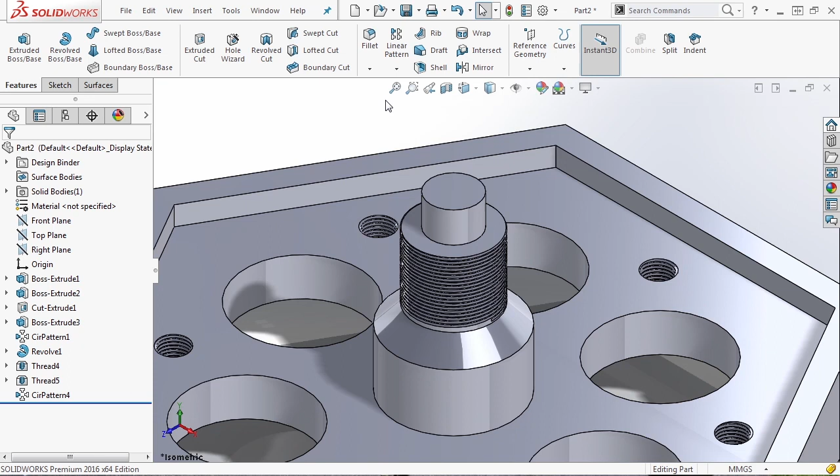To add a chamfer, let's go up to our fillet dropdown and select chamfer. We're going to start by selecting the edge on the end of our part. You'll notice we get a nice preview on the screen, and there's also a dialog box that pops up. This allows us to change the parameters by selecting and manually inputting them, or by using the up and down arrows.

But there are some options in the parameters that you don't have in that dialog box. For instance, you can change it from angle distance to distance distance. You can also use equal distance or flip direction options in here, as well as a whole host of other things. For our purposes, the only thing we're going to modify is the angle.

We're going to change from a 45-degree to a 60-degree angle. You'll notice that it automatically disappears, or it changes the preview. If we use the flip direction option, we now get our preview back. What happened is, by default, the way it was originally set up, adding that 60-degree chamfer was removing the center—it was going past a perfect point. So we had to flip the direction.

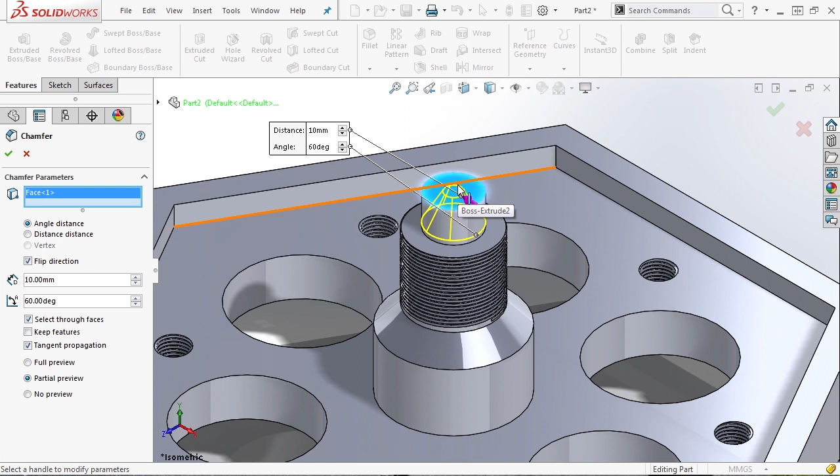Now, if you want to do this on the screen, you simply left click on the purple arrow, and that'll change the direction of the chamfer. We can say OK, and take a look at the tip that's been added.

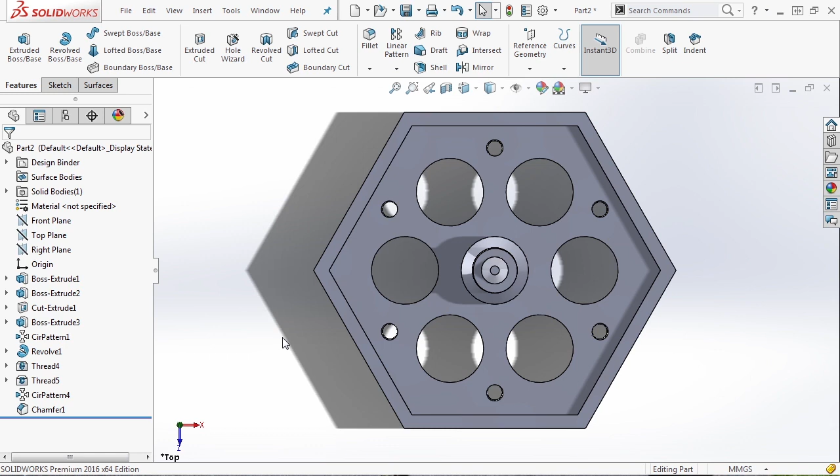The next thing we want to do is add a few fillets. Because this part is machined, if we view it from the top side, you'll notice we have some sharp internal corners. These are corners that could not be physically machined on a mill. So we want to take care of adding a fillet to those, as well as the outside edges.

To do this, we're going to start by selecting fillet, and we're going to modify the fillet radius value. By default, whenever you start fillet, this is automatically highlighted, so you can just start typing. In this case, I'm going to say 15 millimeters and then start selecting.

Now, the fillet tool inside SolidWorks is one of the best in the industry. It allows us to make a selection, and from the quick context that pops up, you have a whole host of options to make your selection process quite a bit easier. As you go down the line, you'll notice it has all concave edges, all edges on the part, all connected edges, right feature, internal to feature, and so on.

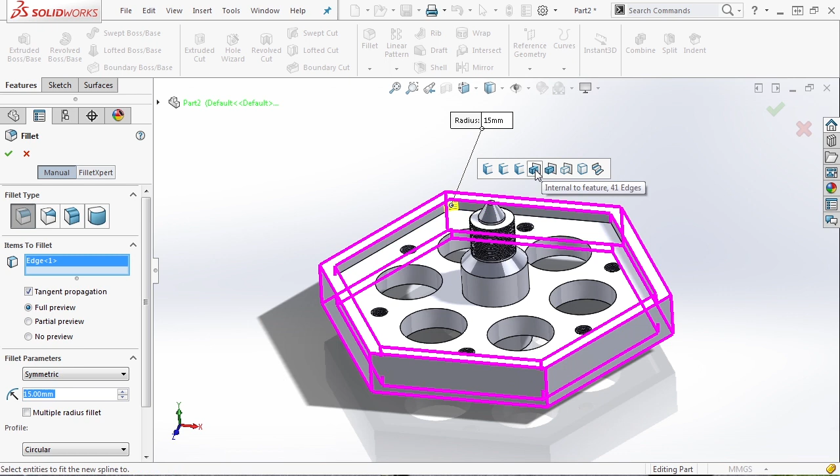The one we're really concerned with is connected to start loop, which is the internal 5 edges on the top. So we left click on this, and it automatically grabs all those edges. Then I'm going to hold the middle mouse button down, rotate around, and make that same selection process on the bottom. This grabs all the internal edges we need to be concerned with, so we can say OK.

Next, we're going to add another fillet, and this time the fillet value is going to be 30 millimeters. The 30 millimeter value came from a 15 millimeter internal value and a 15 millimeter wall. That way we keep a nice consistent wall thickness all the way around our part.

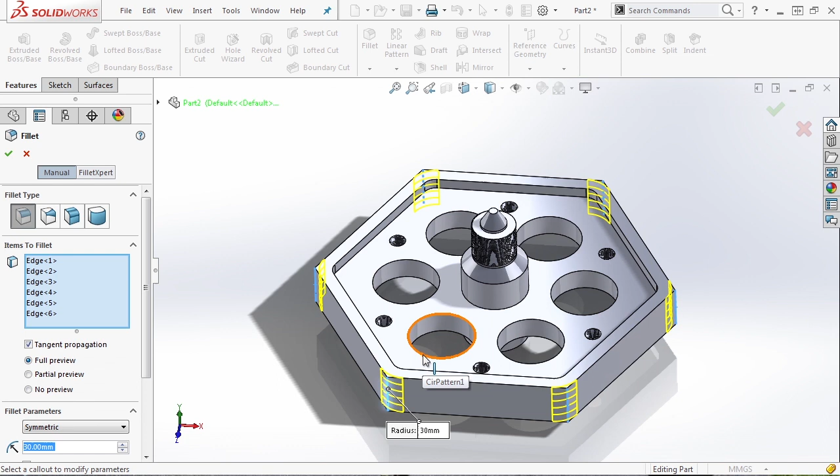I'm going to select a single outside edge, and again use my quick context menu to grab all the outside loops and say OK. Now if we take a look at this from the top, we have a nice 15 millimeter internal radii, so we can use a 30 millimeter diameter machining bit, and we have a nice 30 millimeter outside that we can go all the way around and machine the outside of our part.

Let's go back to an ISO view and take a look at what we've done so far. To this point, we've added a lot of geometry. We started from scratch using the additive type of manufacturing, so we added all of our geometry.

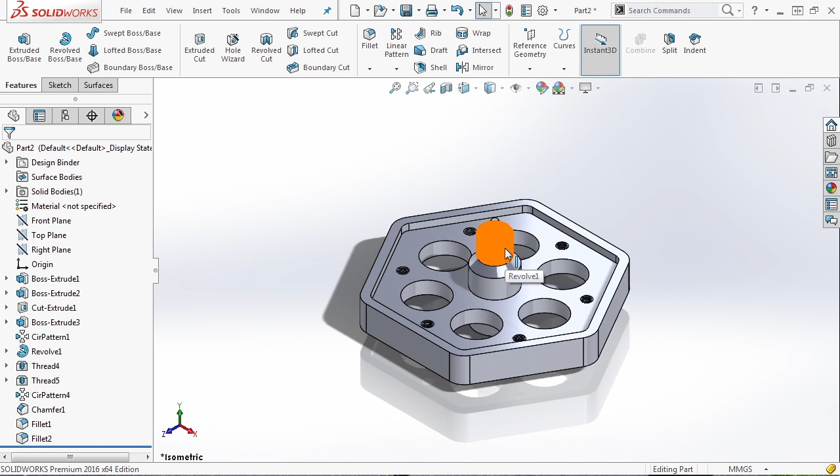We started with the outside profile, added the internal ribbing or internal wall, and started removing some material. We removed the holes, added a boss, then created a pattern, and started doing things like cutting threads and adding additional features like fillets and chamfers. So the only thing really left for us to do is make some final updates to the part.

Now, as we rotate this part around, we have the center boss, which is completely full right now, and we need to add a little bit more detail to it. So what I want to do is a revolve cut to remove some material from the inside, and then create a hex that we can put a wrench on the outside.

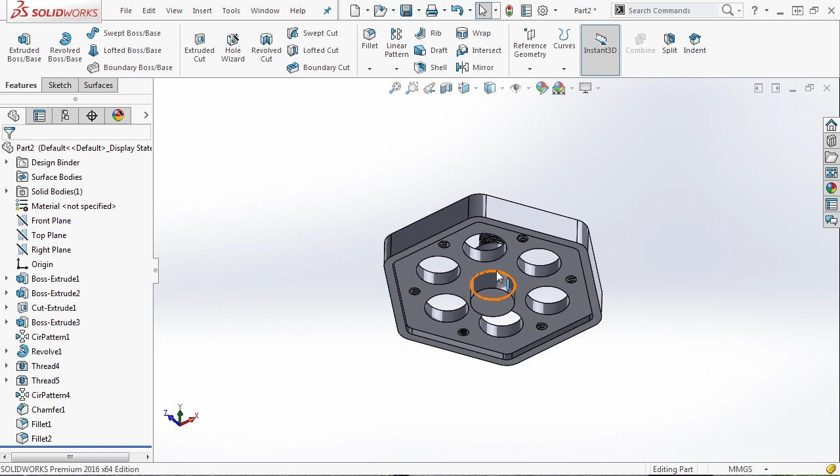So to start with, I'm going to use the section view option and say OK. Now with the section view, I want to select the plane that we used to section, in this case the front plane, and start a new sketch.

Now by default, you won't be able to use this geometry, even though we can select it. You'll notice if I select it and use my convert entities option, it doesn't allow me to bring it in.

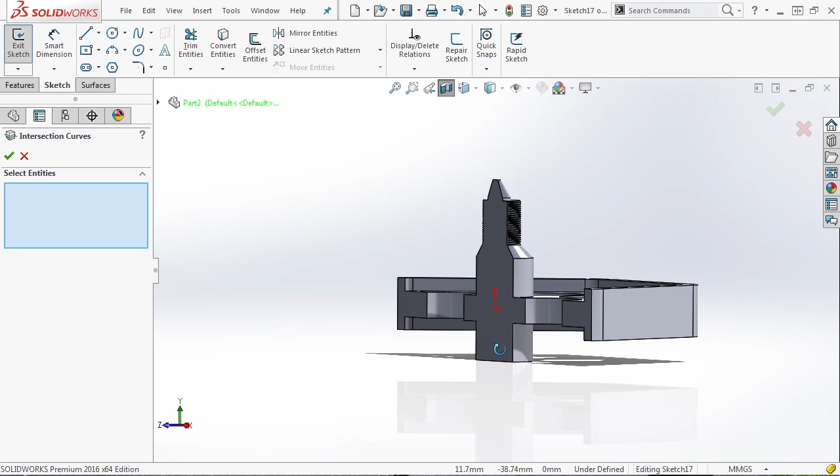So the way we need to bring some geometry in is use the convert entities dropdown, select intersection curve, rotate this around, grab the outside of the lower boss, the outside of the upper boss, and the outside of the major chamfer on this boss section, and select OK, then hit OK one more time. Then I'm going to use Control 8, or use the Normal To option, to look back at this.

I'm going to select all the entities on the left side and delete them using the delete key on my keyboard. I then want to take all the entities on the right side and use them for an offset. But to get started, I'm going to hit L on my keyboard to start the line tool.

I'm going to draw a line from the origin straight down, double click the left mouse button to end the line creation, but still keep the insert line tool open. Then I'm going to draw another line from the origin straight up.

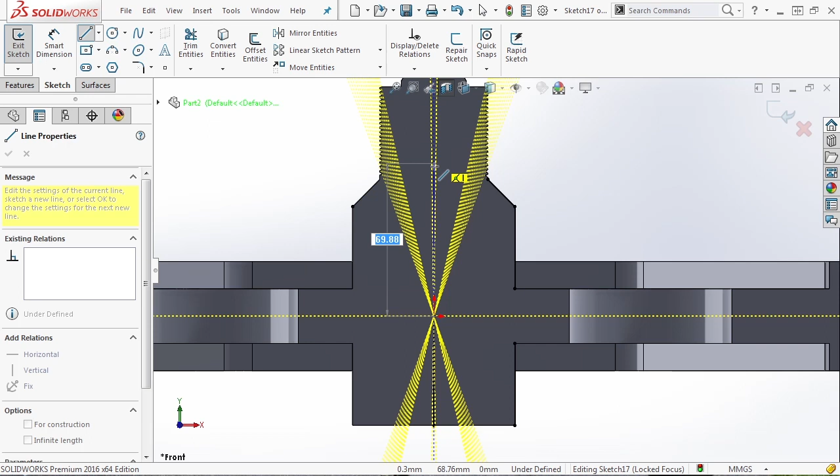Now you'll notice that it's automatically trying to snap to some geometry, so I'm going to hold down the control key to turn off any pervasive relations that are trying to be added. Then I'm going to hit the escape key. While this line is still selected, I'm going to select it one more time and make it vertical.

The next thing I want to do is again hit the L key, start a new line, and connect these two edges. Now I can hit escape one more time, select one of these outside lines, hit the S key, and do an offset.

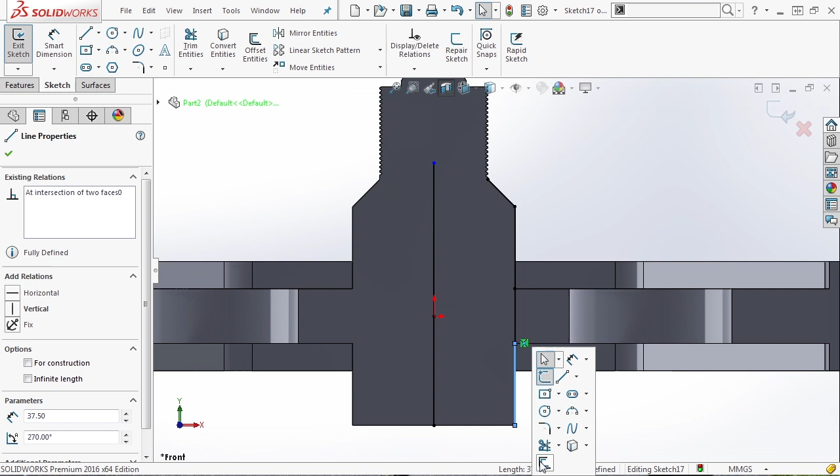Now we're going to be offsetting this inward 10 millimeters, and you notice that we have some options: add dimensions, we can reverse the offset inward or outward. We have the select chain option, which automatically grabs any entities connected to this chain. We have bidirectional, so we can offset it inward and outward.

We have the cap ends option, which is now new for 2016, allowing us to cap ends on a non-bidirectional offset. In the past, you could only do it if you offset inward and outward. Very handy, though not something we need to use in this specific instance.

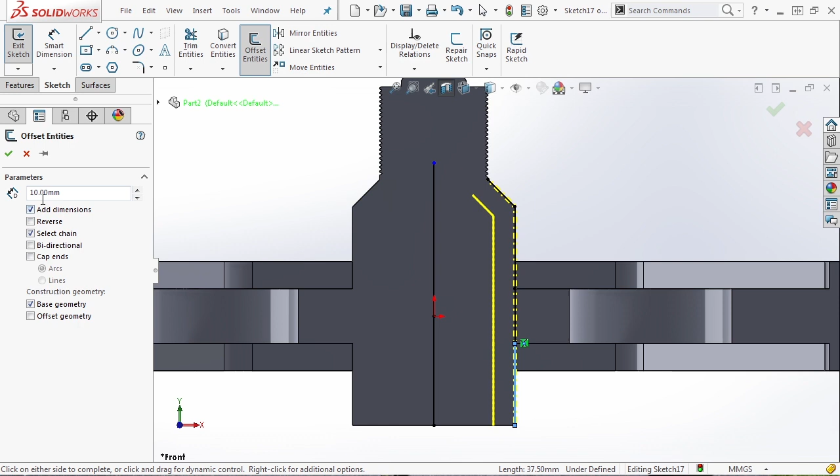Then we also have options to make construction geometry of the base, which is what we initially selected, or the offset geometry. So in this case, we want to make the base geometry construction, select chain, and add a dimension of 10 millimeters, say OK. So what we've done is offset the outside chain here by 10 millimeters.

We can now drag this endpoint, and again hold down the control key to make sure you're not accidentally snapping to some geometry. Then we want to take this edge and drag it up, holding down the control key again so we don't accidentally snap to some geometry.

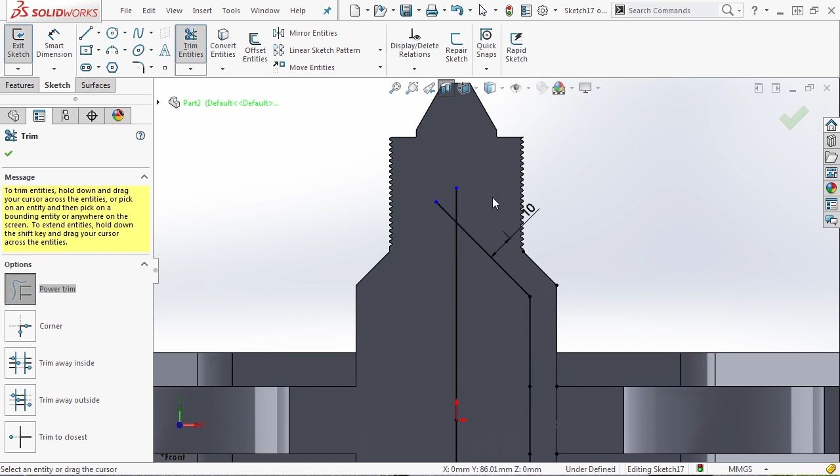Then we're going to hit the T key on the keyboard if you set up your trim tool quick key like I did, or you can go up to your toolbar, go down to trim entities and select trim, and use the power trim, holding down the left mouse button to remove the additional entities so that we now have a fully defined sketch.

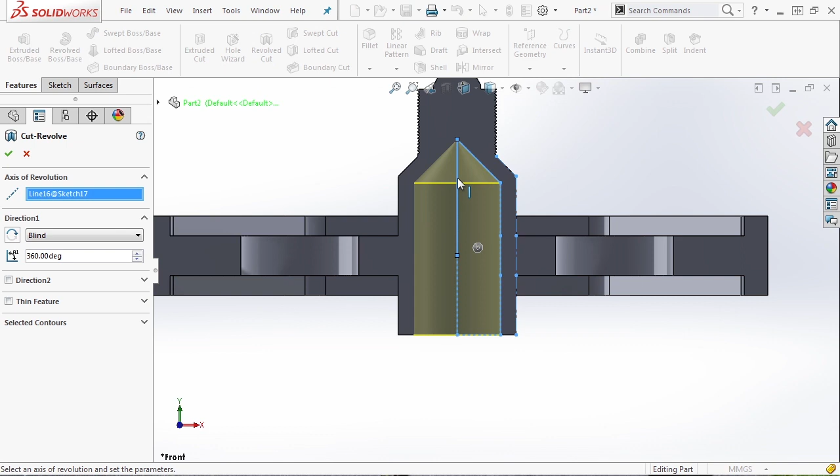Lastly, we're going to use the line tool one more time by hitting L, and we want to finish off to make a closed profile. We can hit escape twice and exit our sketch. With the sketch still selected, we're going to go to revolved cut. For our axis of revolution, we're going to select the inside edge. You can rotate this around to get a preview and say OK.

So now what we've done is removed a little bit more material from the inside of this part. We can turn our section view off and take a look at the results. So this now lightened up the part a little bit, removed some material that we didn't need, and now there's one last thing that I'd like to do.

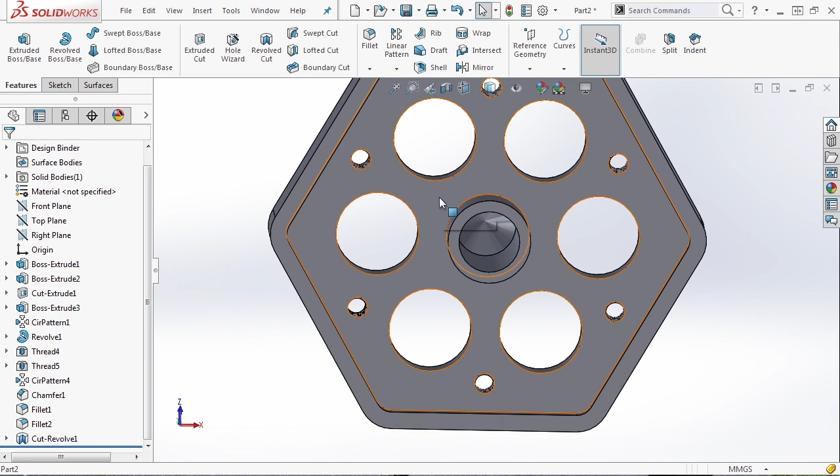I want to start a new sketch on the back face of my part. I want to go back to my polygon option, make sure that it still has 6 for the number of sides, and I'm going to start at the origin and simply drag it outward.

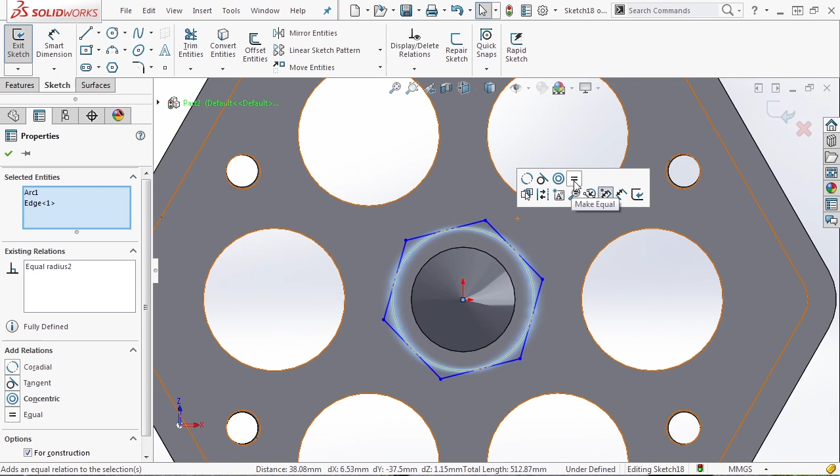I'm going to hit escape on the keyboard to end the polygon tool, select the construction inscribed circle, control select the outer edge of my boss, and I'm going to make those equal. I then want to select one of the straight edges and make it horizontal. This gives me a fully defined sketch.

Next, I want to select the inside diameter of what we just did a revolve cut on. You'll notice that when we do this, up in the top left-hand corner, we have this new set of graphics that pops up. This is something that SolidWorks added for 2016 called the breadcrumb. Now, this pops up whenever you select sketches, features, or edges, and it shows you what they belong to.

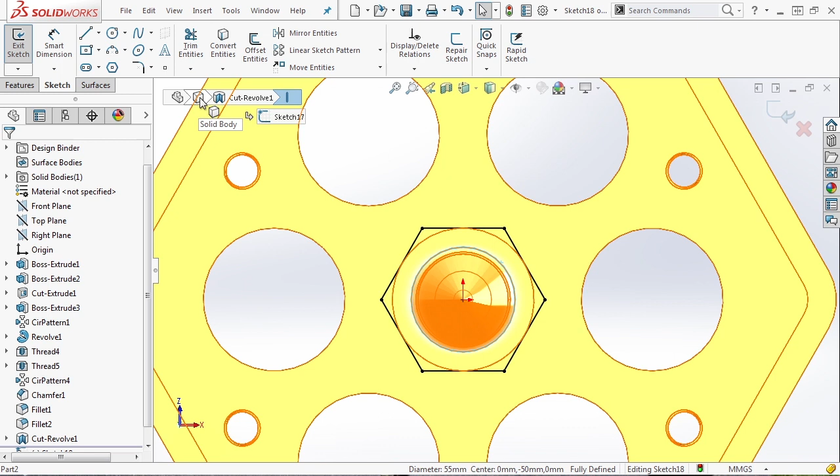So you'll notice that sketch 17, we're selecting an edge, belongs to cut revolve. This was the feature we just created to remove that material. So it's telling us this edge was created based on this feature. This feature belongs to the solid body, which is part of the entire part. In this case, it says part 2 because I haven't saved it yet, but it belongs to the entire part.

Now this breadcrumb gets quite a bit more detailed as the parts get a little bit more complex, you start adding more geometry and so on. It can be a very handy way for you to track back to certain things while you're in the sketching or part environment or even the assembly environment to make quick edits.

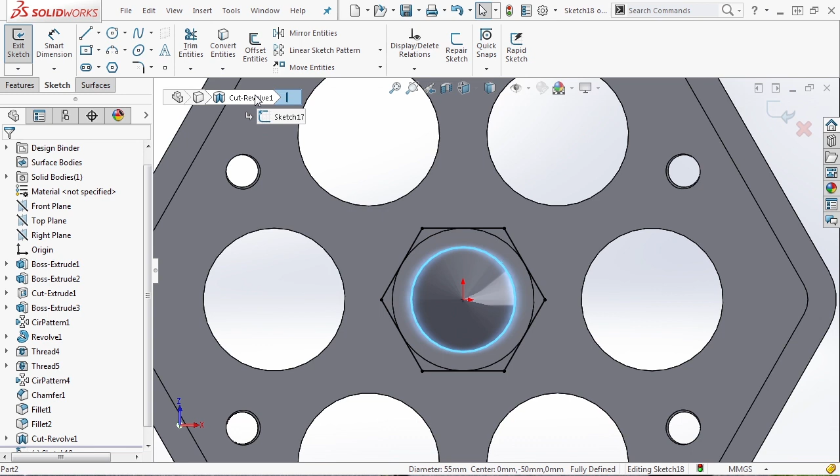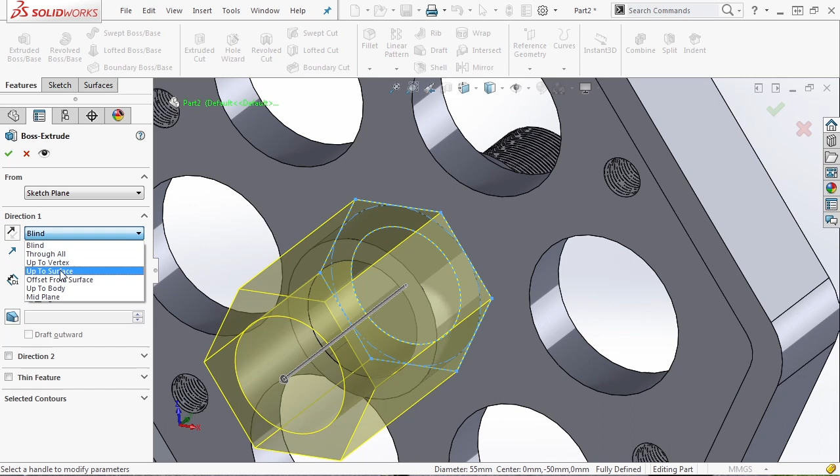In this case, with this internal edge selected, we want to select Convert Entities. If I rotate this around, you can see that our sketch is the polygon with 6 edges on the outside and an ID that matches the revolve cut on the inside of our part. We can now exit our sketch and we can do an extruded boss base. For my direction 1 end condition, we want to change it from blind to up to surface. And we want to select the bottom edge of our boss and say OK.

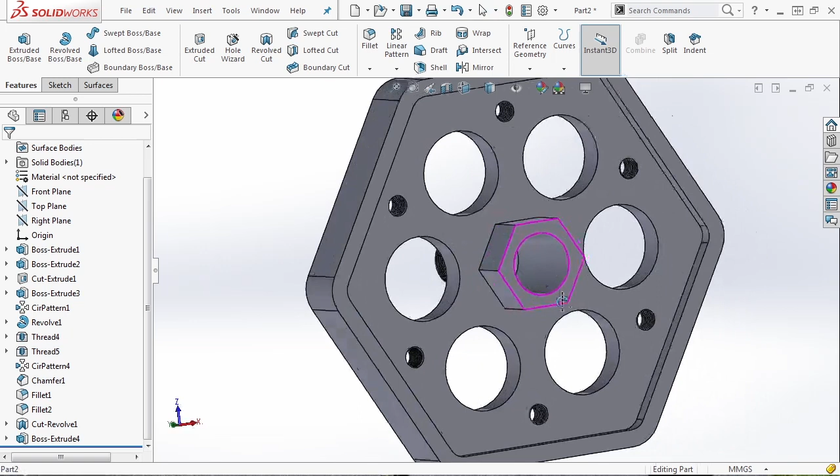So now what we've done is we've added a hex boss that has the same inside dimension of the revolve cut we had, and we now have a place that we could put a socket or a wrench on. So in this case, if we were using this part and we weren't able to get our hands around the outside of the part, or we had limited space, we could also use a small socket wrench and apply some force or whatever we need to actually insert this part.

If we take a look at a section view, we can get a pretty good idea of the part and how it's been created, where material could still be removed if we wish, and that we have a nice, consistent, solid part all the way through. Let's go ahead and go back to an isometric view. We're going to save our part, and that completes creating our machined design part.

As you move forward creating your own machined parts, again, you have to be very careful about the geometry you create and the fact that it can actually be machined. So in this case, this part can be machined, and the 18mm tapped holes are a great way for us to hold this down as we're machining it.